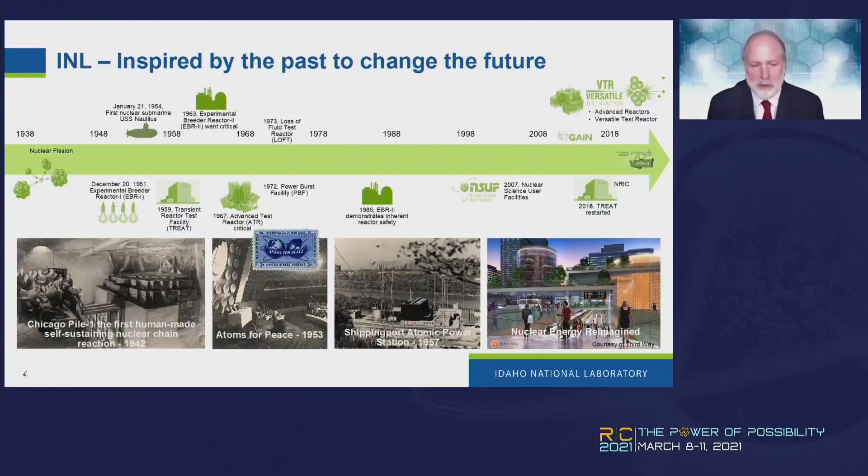Okay, I'm going to start with sort of a timeline. I think most people are familiar with the history of Idaho National Lab and the site and the demonstrations and test reactors that we had. This provides a timeline starting with the first reactor we had on our site in 1951 and progresses through noting some of the key reactor developments as the National Reactor Testing Station, and you can see it proceeds up to current times, with TREAT restart being the most recent reactor that was brought back online, but with plans for the future. So the next slide talks about our plans for the future.

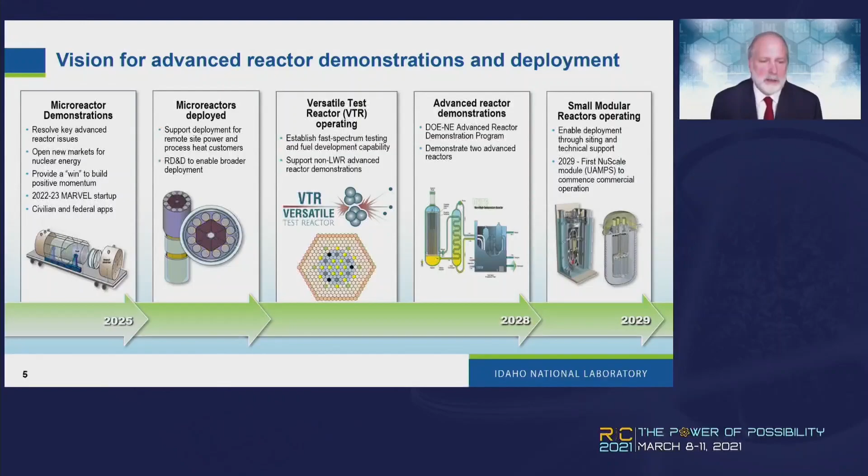It gives a high-level extension of that timeline where you can see how the different reactors being developed fit into this schedule. So microreactors, of course, on the left-hand side are the nearest term. We see those reactors being developed and demonstrated by 2025 with several reactors actively under development right now, closely followed by deployment. We're working on the Versatile Test Reactor. You all are probably familiar with the Advanced Reactor Demonstration Program supporting 2 reactor demonstrations this decade, and then also the UAMPS NuScale Small Modular Reactor. So you can see we're continuing with the timeline of developing and deploying reactors in general, but microreactors will be the nearest term. Next slide.

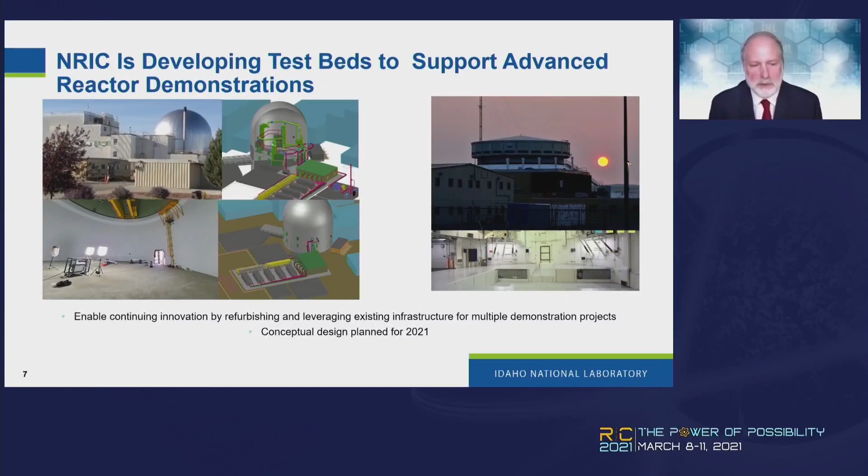As far as test beds that will enable reactor demonstrations, one on the left is related to the EBR-II dome and using that to support microreactor demonstrations. There are some pictures here of the dome. Obviously, a fast sodium-cooled reactor operated in this dome for several decades, and it's now available to support future reactors. On the right-hand side is a zero power physics reactor cell that also represents an existing location that we can use to develop and demonstrate reactors as well. So we're gearing up for those demonstrations and using the unique facilities that we have on our site. Next slide.

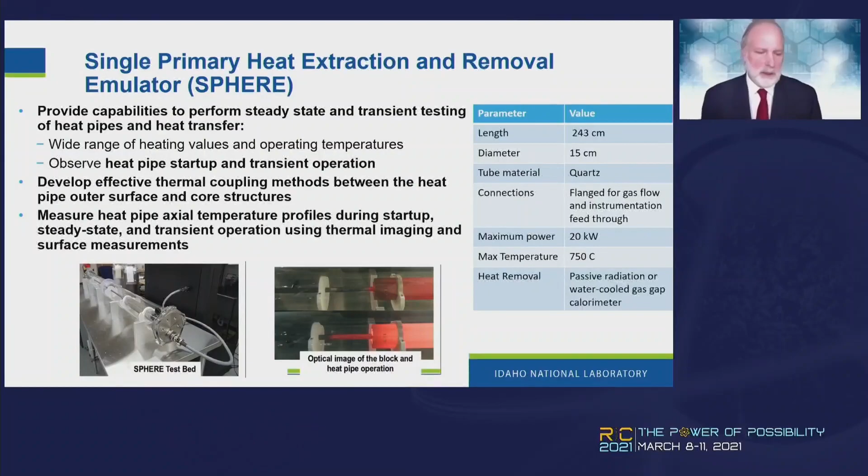So we have a couple of experimental capabilities that we've stood up that are specifically designed to help reactor development. Particularly the one shown here, the Single Primary Heat Extraction and Removal Emulator, SPHERE, is a capability that we can use to perform testing on single heat pipes. There's a picture of this in the lower left, and in the middle there, you can see a recent test that we did in heating up a heat pipe and its associated structure elements. So we can do steady state and transient thermal testing of heat pipes, which of course are a key element of some of the microreactor concepts that are being developed. Some of the stats are provided on the right-hand side. As you can see, this is for a single heat pipe. We are also considering core segments and larger elements, and this is covered on the next slide.

So a larger scale facility that we're developing is called the Microreactor Agile Non-Nuclear Experiment Testbed, bit of a mouthful, but easier to say MAGNET. So this is a larger test bed. You can see in the center there, and I'll show you a picture of it in a minute, but a drawing. This is a vacuum chamber that we can put test articles in that represents microreactor core segments for heat pipe, gas-cooled, or other reactor types.

You can see the chamber size, 5 feet by 5 feet by 10 feet. Apologize for the non-metric units there. But we can provide up to 250 kilowatts of power, remove that heat, and then also connect this to other applications within the laboratory that it's placed. This is up and running now, and we've commissioned it and are doing our first test. But I should mention that these facilities are available to support industry, and happy to talk about that. Next slide.

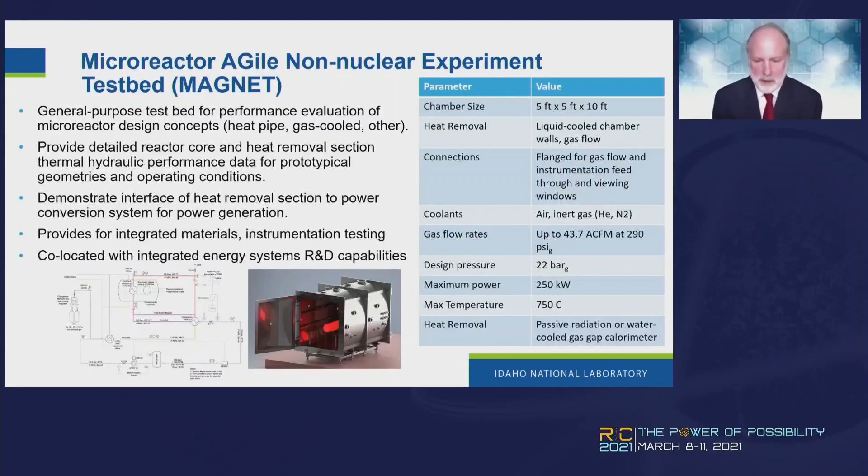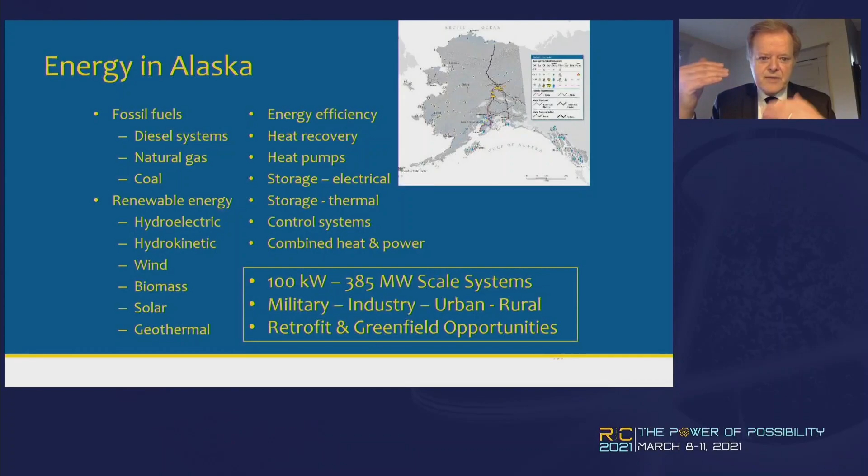And so it's in that large area that all of the major military bases are located. They're part of that grid. We call it the rail belt grid. There's 6 utilities that are functioning there together. And so there's a very rich opportunity for exploring integration, different kinds of loads, and there are brand new opportunities that are evolving as well as retrofit opportunities.

Back in 2009, the state of Alaska's legislature commissioned a study which was performed by the Alaska Energy Authority and the Alaska Center for Energy and Power, looking at what at that time were referred to as small modular reactors. Microreactors weren't in the cards at that time, and looking at possible applications. The study did a very thorough review of the history of nuclear energy and nuclear work during the World War II timeframe, and it's available online. It's very, very instructive for those who are interested in applications in Alaska.

I'd strongly recommend looking at the resources there, and some of the history in particular is captured. Now, remember that was released in 2011. Within days of when it was finished, Fukushima happened. And so everything stopped in terms of interest in the reactors for a while.

Next chart. But that's changed with the evolution of microreactors. And so working with colleagues at the Idaho National Lab and the University of Alaska Anchorage, a study was done looking at what are the attitudes now toward nuclear energy in the state of Alaska. There's some hurt that in some cases has to be addressed responsibly, but there's also potentially emerging opportunities.

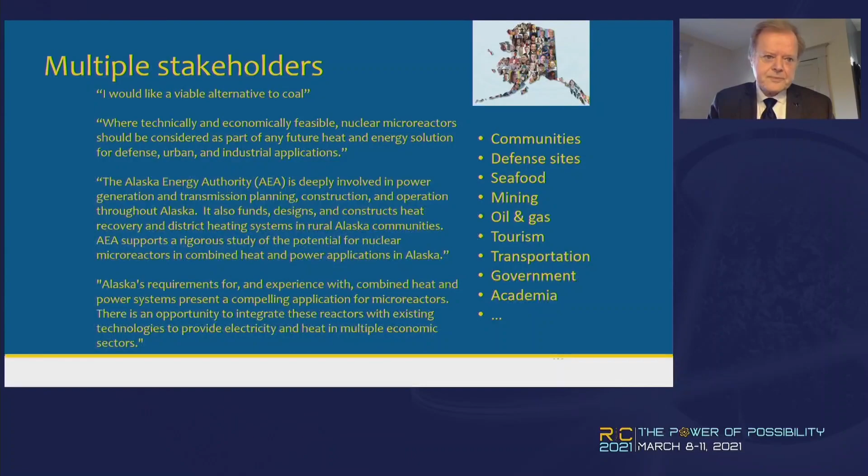We're looking at a range of applications. Defense sites were mentioned. One of the things I'd like to point out is for early deployment of new technologies, it's important to make sure that the application is ready to receive a technology. And so our large defense sites are combined heat and power installations, so there are opportunities to integrate sources of heat and power in existing distribution systems.

The loads are very well characterized. There's not a lot of mystery. And there are a range of security and environmental preparation provisions, et cetera, already in place. So defense sites seem like a very interesting application. Next chart.

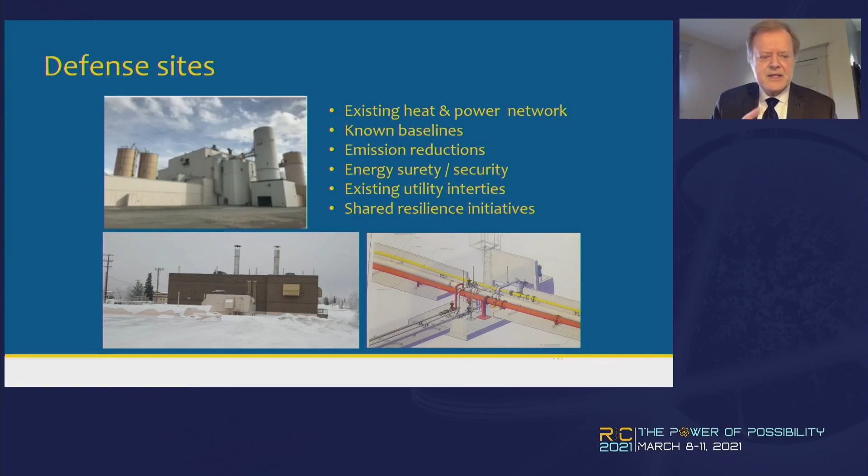In many parts of Alaska, we have legacy systems; you see the center of some buildings on Adak. They need to be destroyed to make the system safe. Reactors can provide incineration opportunities in terms of doing that safely. You see waste from a seafood processor on the right. You see landfills that need to have compact sources of dealing with waste, since there's no way to haul it out of these remote locations.

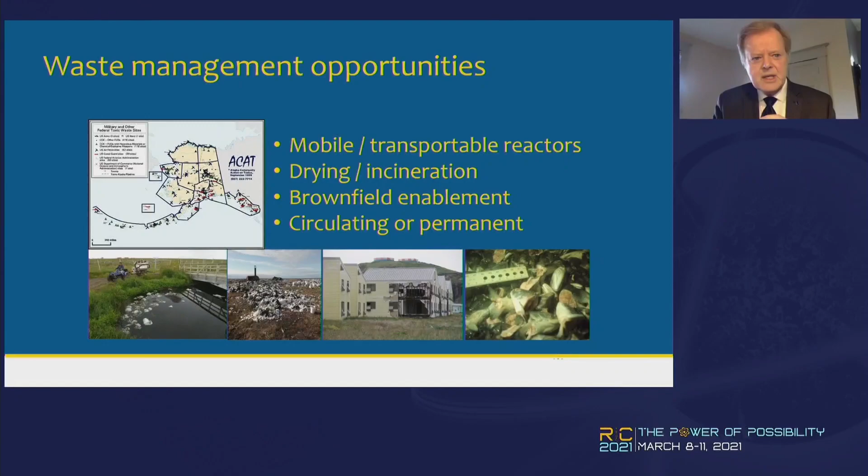And on the lower left, that's an actual sewage lagoon. It's untreated sewage that is allowed to accumulate, and it percolates down after a while. But it's a challenge that sources of heat and power can address. So waste management could be an interesting opportunity once we can get the technology where we need it. Next chart.

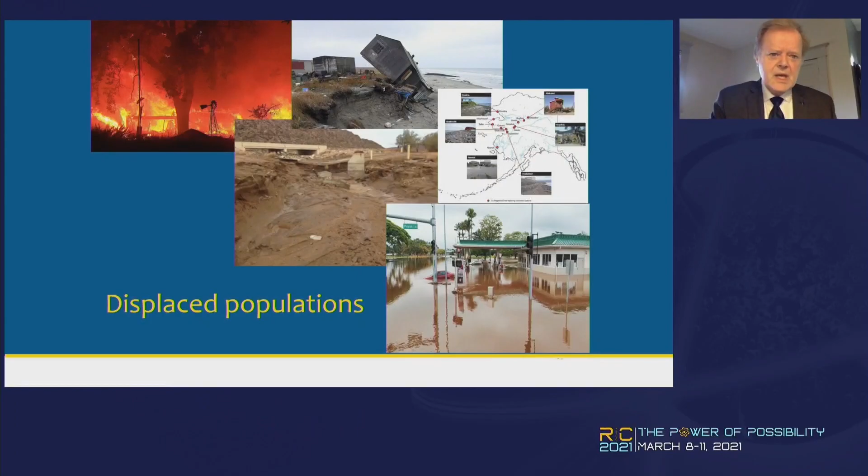And in addition, we have many climate change situations in Alaska. If you would click again, this is not unique to the state of Alaska. There are on the order of 31 communities that have been identified as in danger of climate impact, requiring them to relocate. The opportunity and the needs for characterizing this effectively and looking holistically at energy solutions is very, very keen there, and is, I think, appropriate globally as a need. Next chart.

So I want to talk through a couple of the application deployments. If you just click, there's a whole range of different applications. There are different technologies, but we need to migrate the technologies through lower risk settings to higher risk settings. The progression here is what I am recommending: defense, defense to municipal utility ties, then perhaps remote industry, then municipalities, larger communities, and then maybe small communities. This is probably a 20-year evolution as the technology evolves, always looking at the criteria there in the lower right. Next chart.

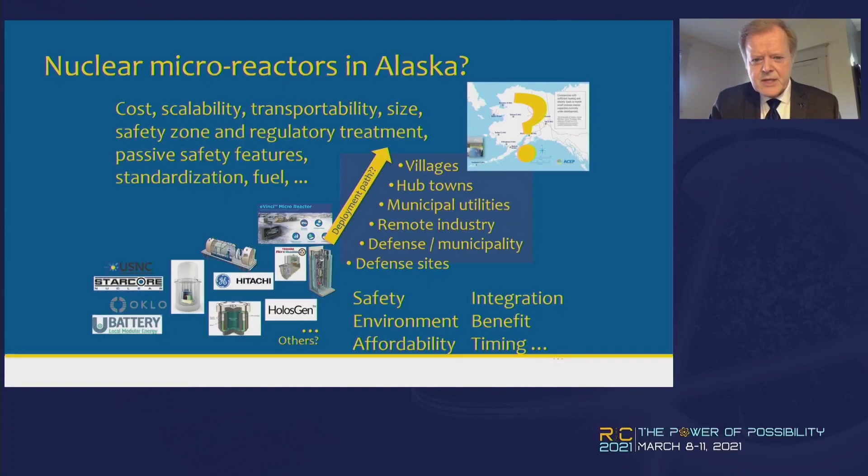This is 15-minute data from Fort Wainwright, which is in Fairbanks. You see the green line there on the top left, that's the electrical load. You can see it's bouncing up and down over the day, as you might expect, but that's a whole year's worth of data. And what you see is it's not changing a lot during the year. Not steady state, but it's fairly predictable. It's compared with that rainbow-looking grayish curve. That's the daily ambient temperature.

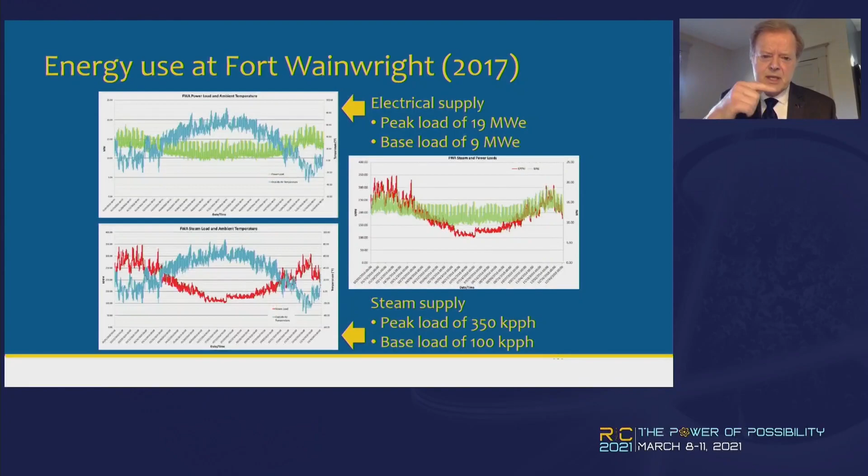The curve on the lower left, that's the steam output from the combined heat and power plant. January's on your left and December's on your right. And what you can see is that the heat demand varies very significantly depending on the temperature, and there's huge differences seasonally with the heat and the heat to power ratio. So looking at solutions that combine reactors with load following and heat to electricity shifting capabilities, and integration with other technologies for storage and perhaps peaking systems, is very important, and some great on-ramps for some of the technologies that Dr. Jean talked about being involved for testing at Idaho National Lab.

So the next chart shows similar data for Eielson Air Force Base. Now this is on a monthly basis, four different snapshot months. But again, it provides an opportunity of comparing the electrical and the thermal changes. And you can see again the significant variation seasonally, and even within a given month, the changes in the magnitude of power in particular. Next chart.

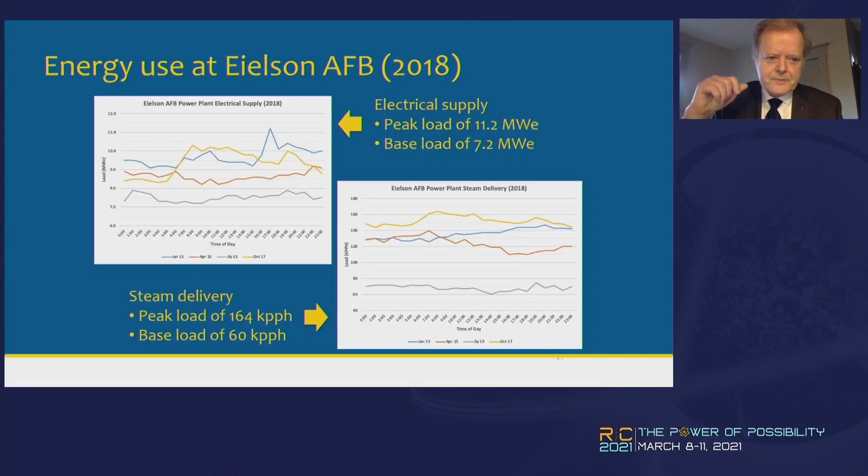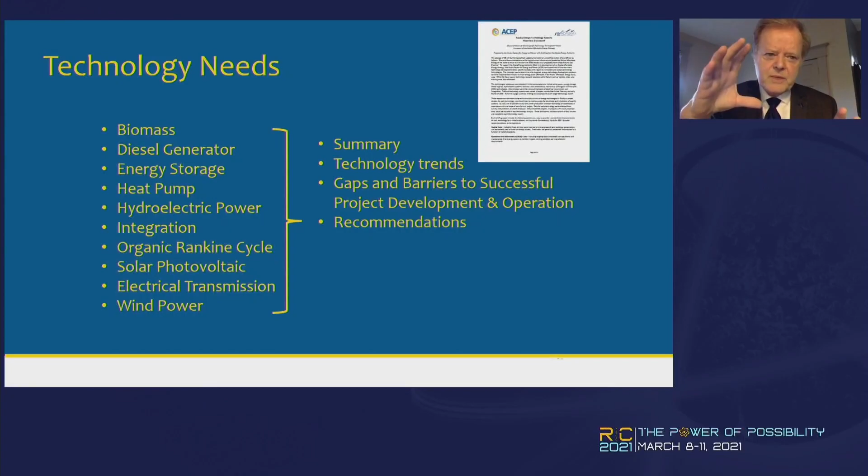There are a variety of technology needs that are documented that will be of use to developers. These include technologies that are highly germane to microreactor integration, but there's needs for addressing other topics. This is something that we would be very keen to explore between the Department of Energy and other elements.

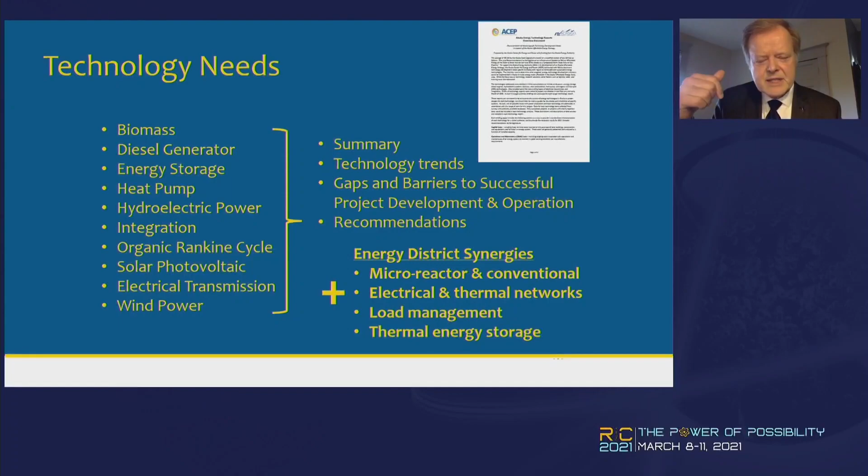We want to make sure we're not a solution looking for a problem. We want to make sure we're engaging stakeholders and talking with them from the pull perspective. Many questions need to be addressed.

It's important that we think about the people who are going to be using this, the businesses, the timing of their needs, where we should start, how we should deploy, addressing all of these factors.

I want to close with just why I think Alaska is a very excellent place to be considering applications here. A wide range of diversity in the needs, existing demonstration sites, small enough scale so that the magnitude of the investments is reasonable, and yet existing infrastructure available for tying in systems. And there's just the street credibility of doing things in Alaska.

So we believe that there's much opportunity for deploying the technology beyond the state of Alaska based on the lessons learned, globally.

Lots to decide here. There's ongoing interaction with the legislature, with other stakeholders across the state. We'd like to see these applications characterized and represented in some of the testing that's ongoing in Canada, as well as in the United States, multiple locations, bringing use cases to bear there, and then ultimately bringing the technologies north when the testing has validated them and shown that they are robust.

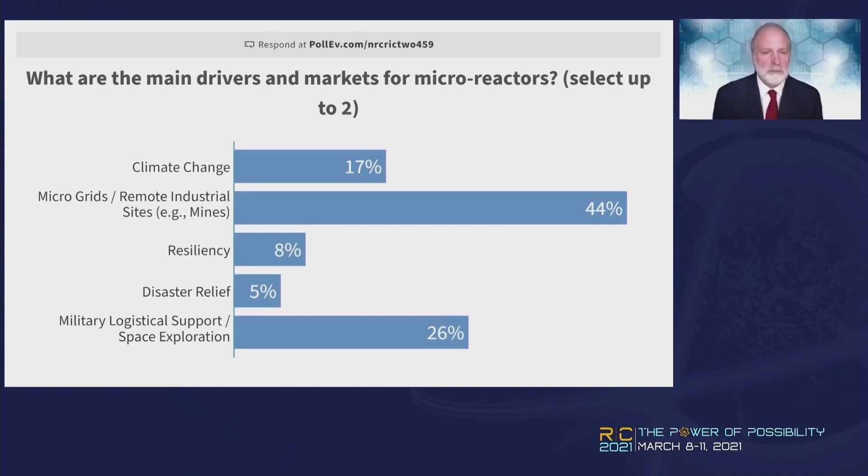Thanks, Dr. Jean. Yes, I would just say that resiliency and climate change, I view those as interrelated. As we saw in Texas, it's important to ensure that we have a resilient base load to provide the electricity to the population. And maybe Dr. Jean can comment, but the Department of Energy is working across multiple labs on integrated energy systems. And we find that integration, as Dr. Rowe pointed out, and I believe Dr. Jean pointed out also, is entirely important for this deployment of microreactors.

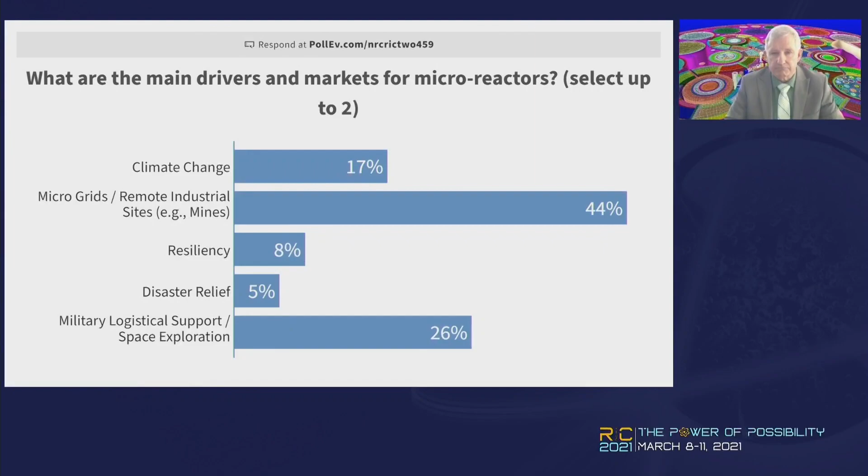Thank you, Commissioner. I want to second your important thought to go Badgers.

If you could advance one slide, you'll see what we call in the DoD the bottom line up front. So the DoD has an energy problem. We have a huge need for energy. We have difficult logistical tails. There's been a need identified in a variety of places now, executive order, congressional language, etc.

We believe TRISO fuel is a game-changing development that will allow us to make this feasible. We kicked off a 2-year design competition back in March of 2020. So we are a year into that now, and we remain on pace to do outdoor mobility testing this reactor at a DOE installation in 2024. Next slide, please.

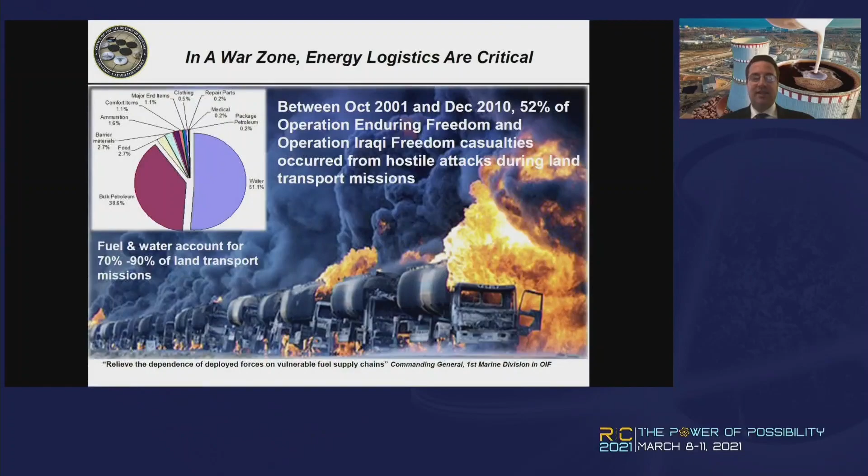So this need was driven in part out of what was seen in Iraq and Afghanistan, where 52% of all casualties happen on land transport missions. Moving fuel and water around is most of what the DoD moves. And if there's some way to make the fuel and energy and water locally, it would be a big game changer for the DoD.

So we've done this. These were not very safe reactors. These were very primitive reactors. And when they were cutting things during the Vietnam War, trying to save money, you had the fact that these reactors were simply more expensive, and so they were canceled. So we haven't seen them since in the Army.

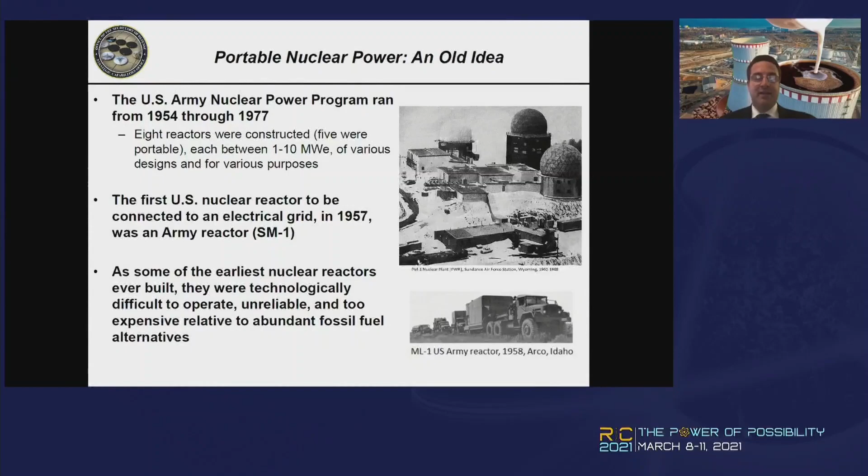If you go to the next slide, you get to the 2016, the Defense Science Board looked at this, and they said what I mentioned already, which is that energy needs are growing rapidly, and energy logistics have never gotten harder. And they acknowledged that nuclear technology is a lot different from the way it was in the 50s and 60s. You no longer have to have people manually moving control rods in and out centimeter by centimeter, and if you do it wrong, you get SL-1. Those sorts of reactors are not what we can build now.

We can build Generation 3 reactors are operating all around the world. We can build inherently safe reactors by design and largely autonomous. So the DSB recommended that someone go around and actually do something about this. Someone should prototype a reactor, was their recommendation, see if we can make this work.

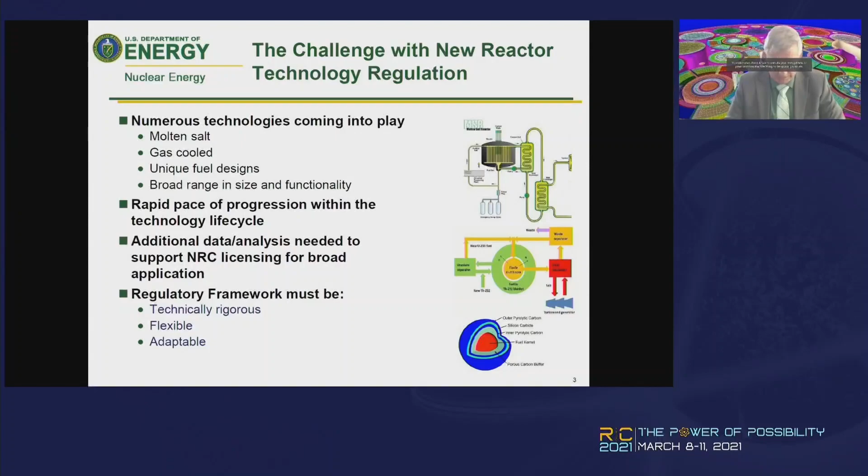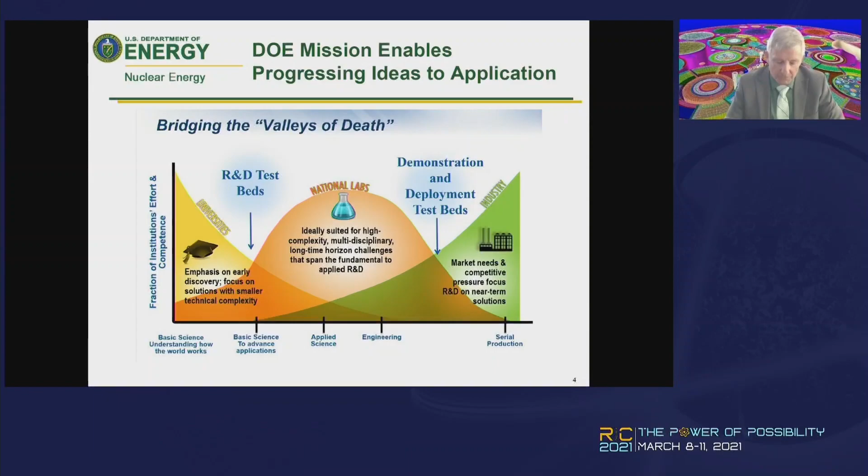National lab capabilities. I won't spend a lot of time here because Dr. Jean talked about it, but the National Reactor Innovation Center enables deployment. The Gateway for Advancements in Nuclear, or GAIN, provides the nuclear energy industry with access to technical, regulatory, and financial support necessary to make innovative nuclear technology gains. We engage in public-private partnerships, allow access to the DOE nuclear labs, and collaboration.

DOE also has fuel fabrication and development capabilities, and we are working with some vendors on providing those capabilities. And DOE assisted the NRC in the Licensing Modernization Project and the technology-inclusive content of application. We are becoming a lead in cybersecurity. Certainly, labs like Oak Ridge have a tremendous supercomputing capability. Next slide.

So the DOE authorization process supports advancements of this technology. Instead of licensing, we call it the authorization basis. It provides a reasonable assurance of worker, public, and environmental protection. We have the same safety goals as the NRC. Here at the Idaho National Lab, I am the authorization official for the new reactors that we'll deploy here.

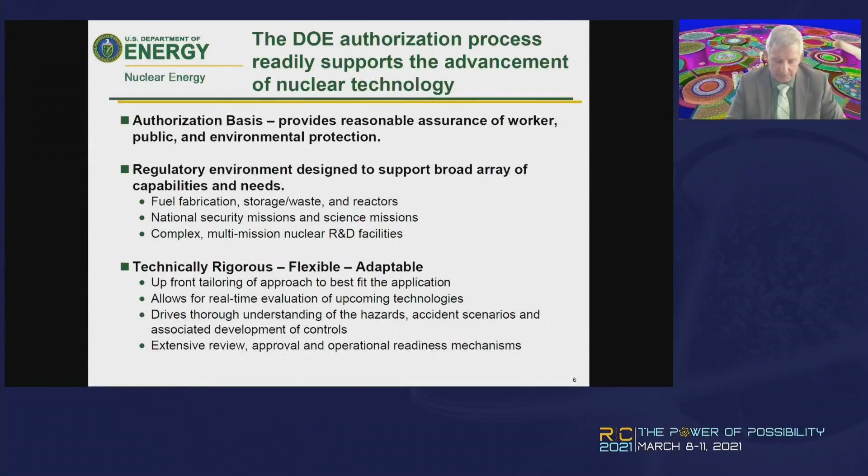The relationships of the regulatory requirements, for those not familiar with DOE: the outer, or the purple oval, is the contract. This provides us somewhat more flexibility than the NRC because we can provide incentives for positive performance in safety and security and program or project performance. And we can also penalize in the incentive for safety or security performance in that area.

This is also where we flow down the requirements below the Code of Federal Regulations. We'll get to this in the next few slides. We call them DOE orders. So they flow down into the contract, and we can tailor those for the specific contract.

The next oval, the authorization basis, includes the safety basis, which is the inner oval, but also includes environmental protection. It includes emergency management and the security plan. And this is where the DOE Office of Enforcement, which is DOE-wide, can take enforcement actions against safety and security issues, and levy civil penalties against the contractor if needed.

And then finally, the inner oval is the safety basis. This includes the documented safety analysis, so in NRC parlance, similar to a license, technical safety requirements, DSA commitments, which are sort of equivalent to the license commitments, the DOE safety evaluation report, and the unreviewed safety question process. And the USQ process was modeled, plagiarized, I'll say, from the NRC's 50.59 process. The next slide.

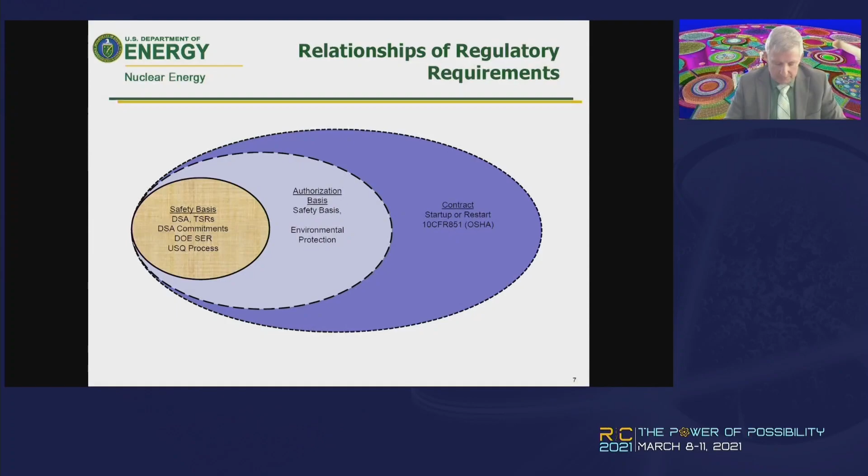Our regulatory structure flows down from the DOE policy, which is signed by the Secretary, down to the Code of Federal Regulations or the rules. The DOE orders, you can also hear them described as directives, implement the rules, and then manuals and standards implement the orders, but those are generally laid out in the contract, specific contract for the labs. And then finally, we have guides, which are assistance on how to implement the orders themselves, but guides are generally not part of the contract.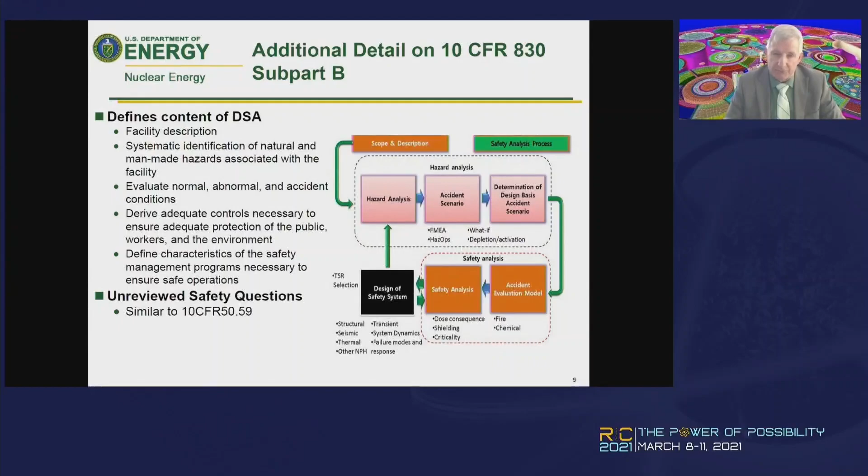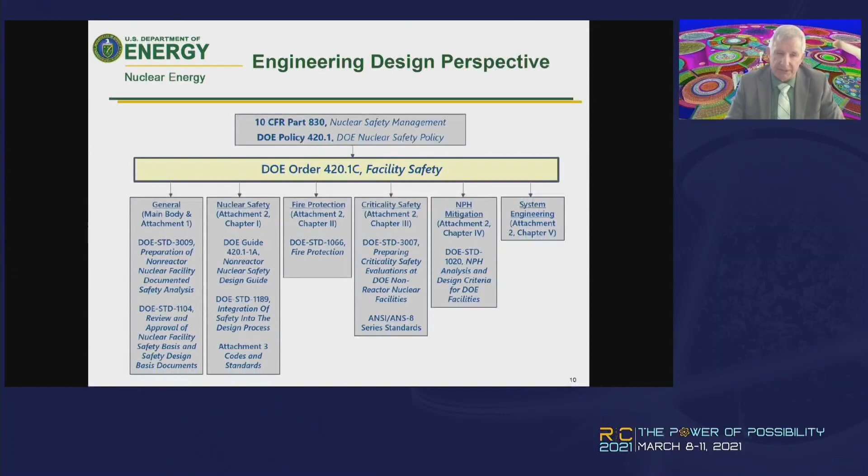Next slide. This is just to highlight, for those not familiar, some of the DOE requirements that flow down to nuclear facilities and their documented safety analysis. In this example, 10 CFR 830 nuclear safety management rolls down to DOE order 420.1C, which is facility safety, which then implements numerous standards and other industry standards. For example, in the middle, DOE standard 1066 really implements many national fire protection codes. And as I previously stated, for the reactors, we've got a new DOE standard, and we are also leveraging Reg Guide 1.232.

Next. So in summary, DOE is uniquely qualified to assist the industry and the NRC to demonstrate new reactor technology. We have a very similar process to the NRC for authorizing DOE reactors, and we have the same adequate protection standards for the public, but we are striving to ensure that we have very low design-basis accident doses at the public boundary. And so with that, thank you very much.

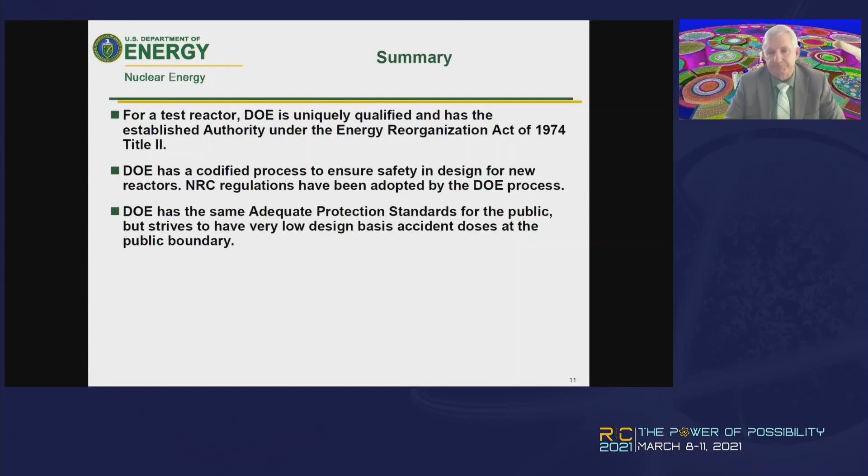Thank you, Mr. Boston, and thank you to all of our presenters. Can I ask the technician to please display the results of our second polling question? Biggest impediments: cost, number one, and regulatory risk, a close second. Would any of our speakers like to comment? Don't forget to unmute.

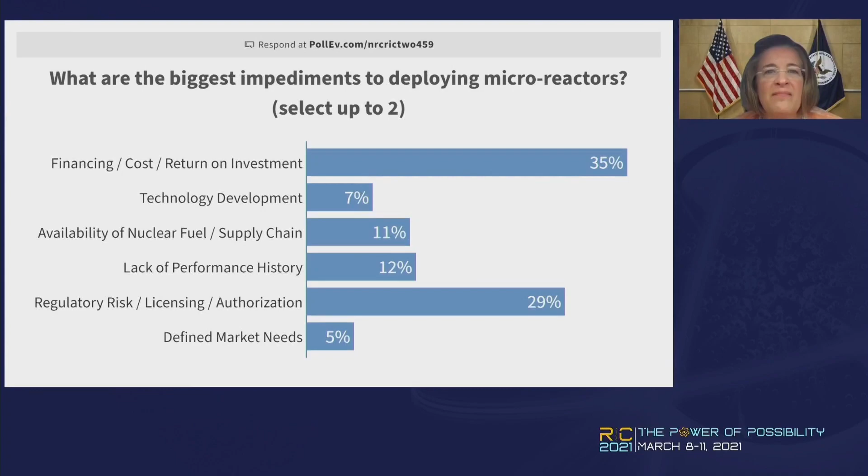I would say that the regulatory risk of licensing adds to the financial risk. DOE is assisting with the licensing basis for UAMPS NuScale at the Idaho National Lab, and that is a driver. And again, with Project Pele and some of the other demonstration technologies, DOE can certainly assist in reducing that risk.

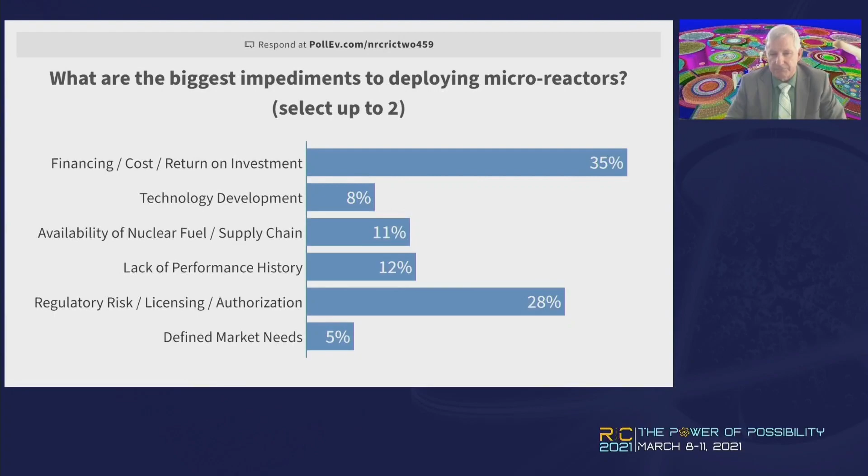This is George. I'd add in on that. As we've interacted with community utilities, the unknowns in terms of the costs and the relatively high cost compared to what is already installed is a very significant issue in terms of embracing the technology, and one that I think creative power purchase agreements and other financial arrangements might help with for earlier adoption.

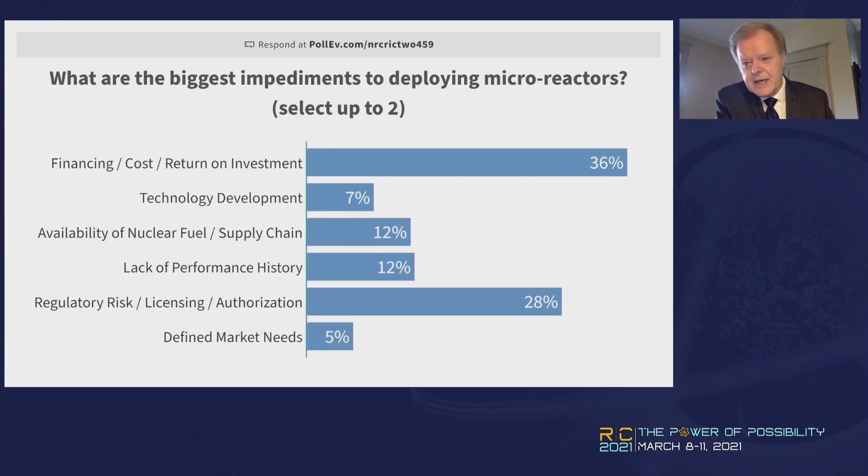Yeah, I would also add that I'm not sure I would necessarily rank them. I would almost invert the question, they all matter, because if any of those things fail, you're not going to get there. In TRL parlance, sorry, technical term, we like to say that if your design has 10 subcomponents and they're all TRL 9 except for one key subcomponent that's TRL 5, your whole design is TRL 5, because if that one thing doesn't work, you're not going to build it. So we have to make sure all these things advance, because if any one of those areas is not solved, then you're not going to have real, tangible nuclear reactors powering things. That's a very good point.

I'd like to go back to George with our first question. The question is, why do you think a microreactor will be economical? Even in Alaska, where you have high energy costs, the cost for a microreactor can still be expensive, considering the upfront costs.

Yeah, like I said earlier, that is a very big unknown. The challenge with implementing a reactor in a high cost of energy setting is you have to realize it's not just the source of power that is the cost driver. There's also all of the utility management, et cetera. That's there regardless of whether the source is a nuclear one or a diesel source or something in between.